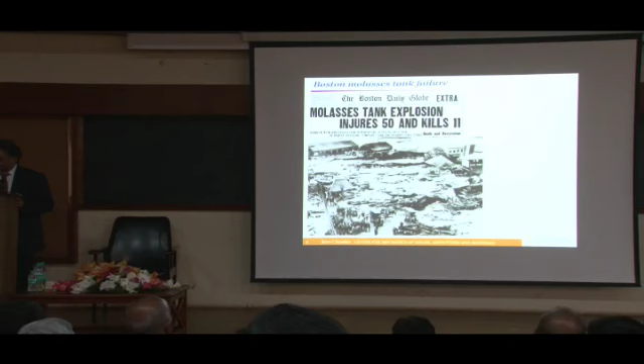Accidents like these happened periodically, and there was interest in being able to design against them, to learn about why these fractures occurred.

This is also a very famous example. This was a T2 tanker that was in a port, sitting still, early in the morning. It was very cold, and all of a sudden, the ship broke into two pieces.

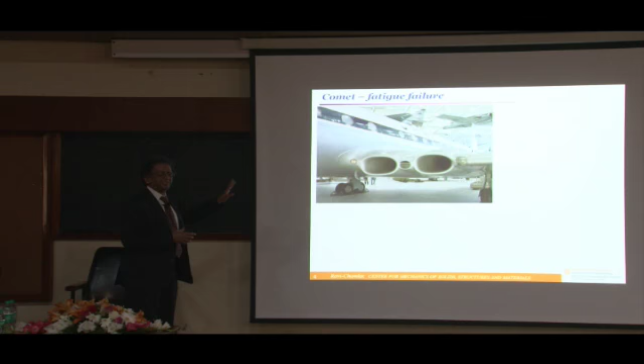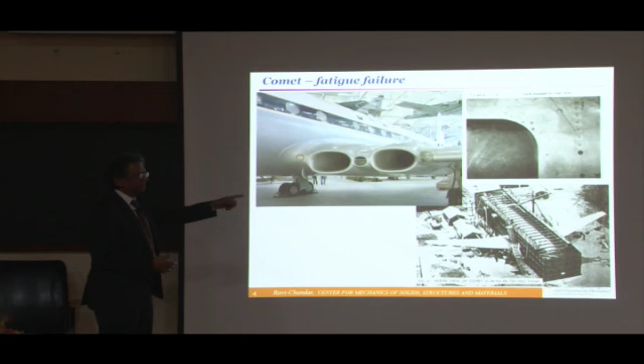What they did was build a huge tank, put the entire airplane in there in order to remove gravity loading, and then simulate the flight loads on that, to cycle it through to the same number of cycles that the airplanes in flight had gone through - the ones that crashed. And they found the idea of fatigue cracks in pressurized vessels.

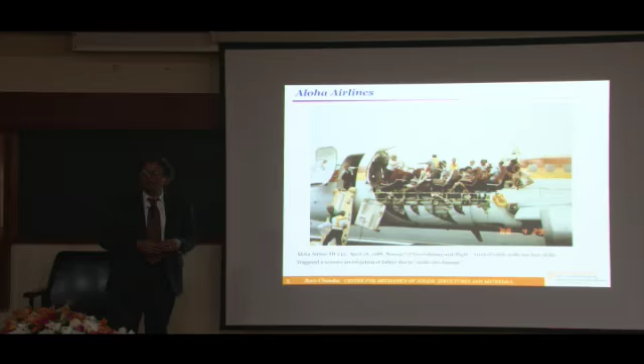Not a very large loss. There's been a theory that's been built on how things break in such structures. And it's not just engineering structures of the type that I have shown - I'll go through a few other examples.

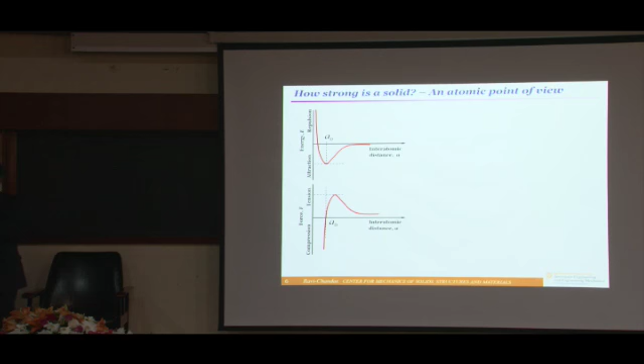You apply a tensile force, a pulling force, above a certain threshold, the solid will break. The atomistics will tell you that. I'm going to define what a crack is, not right now, but in a little bit.

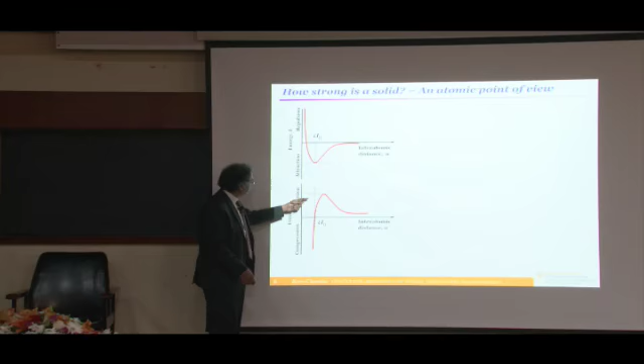Can I ask you to help me a little bit? I forgot to bring a piece of paper. I need a piece of... that would work. Yes, do you need it? Okay, not right now, but in a few minutes.

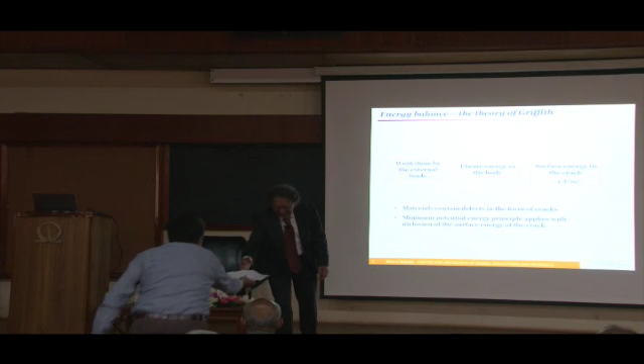So there are different buckets of energy: the energy that you supply, the energy that's stored in the bulk of the solid, and the energy that goes to the surface. That last term is a very tiny amount - for most materials, it's on the order of 1 joule per meter square. But if you ignore that, you ignore surface penalty altogether, so you have to keep that.

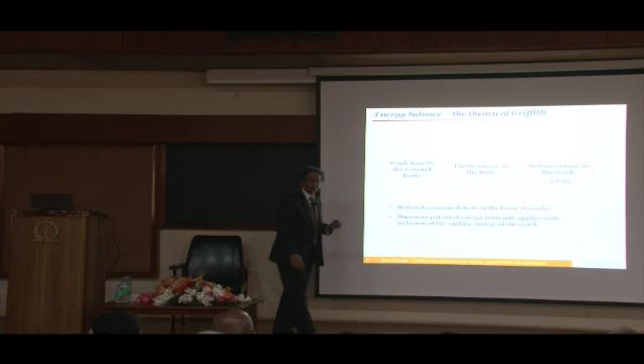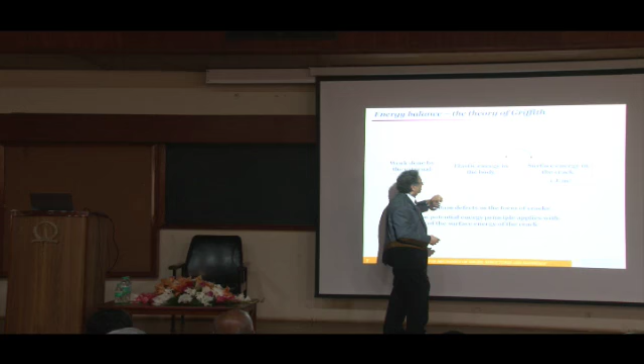So Griffith then suggested that you could have an exchange of energy between the elastic energy in the body, or more generally potential energy in the body, and the surface energy of the crack under suitable conditions. And then you give these names - you call the energy from the mechanical part of the system that gets released as the crack, the defect grows, to be the energy release rate, and label that G.

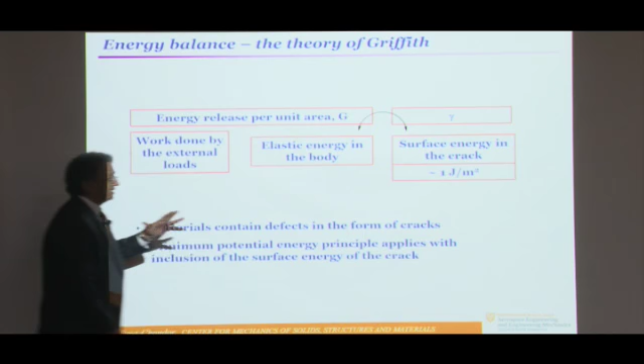The surface energy, let's label as gamma. So we have a condition for failure: if the elastic energy that is recoverable from the mechanical part of the system is used, in addition to creating a free surface, you're always adding the surface energy of the new surface you create.

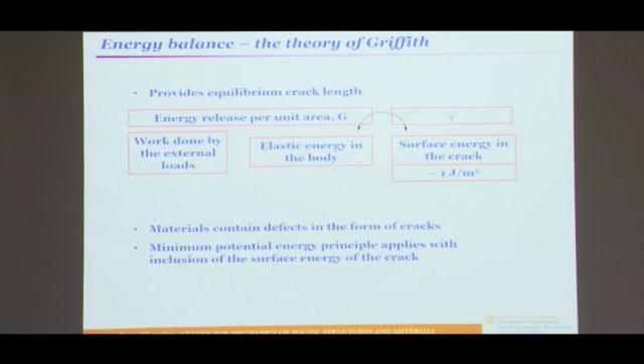It turns out that for most materials this penalty is anywhere from 1 joule per meter squared, but the energy release must be able to provide whatever is needed in this case. So I'm going to pull as I can, but it can't jump - it cannot go over that barrier.

I didn't apply a fraction of the load when I pulled on it. Now I have created this. So as I played around with it a little bit, I jumped over the barrier. There are many ways in which you can overcome this barrier.

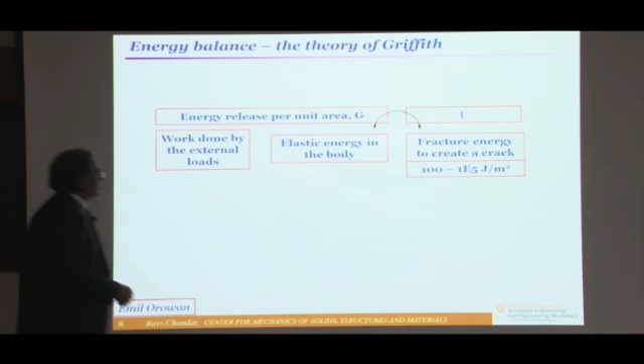The way I did this here was mechanical - I introduced a defect. I could do this chemically, through stress corrosion. What you do is bring water into the vicinity of the defect; it attacks the oxygen in the SiO2, pops off that bond, and the bonds are broken.

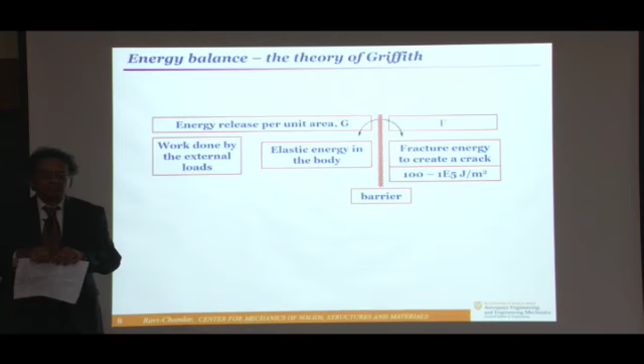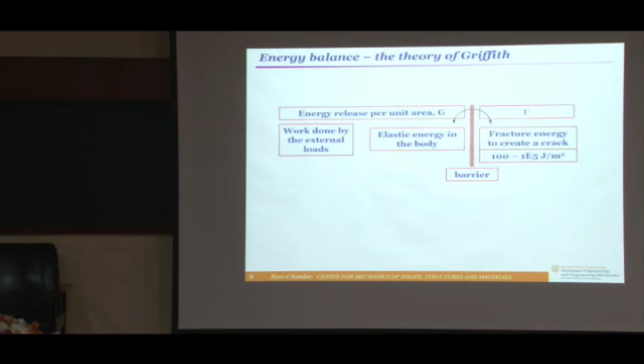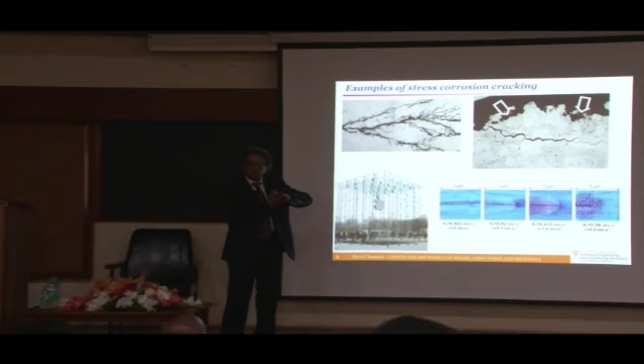But they're extremely slow - this glass will crack at about 10 to the minus 9 meters per second. What I've shown here is the Apple headquarters or Apple store in New York City, made of glass. If the crack only grows at 10 to the minus 9 meters per second, we're all safe - it's not going to break in the lifetime of most people in the universe.

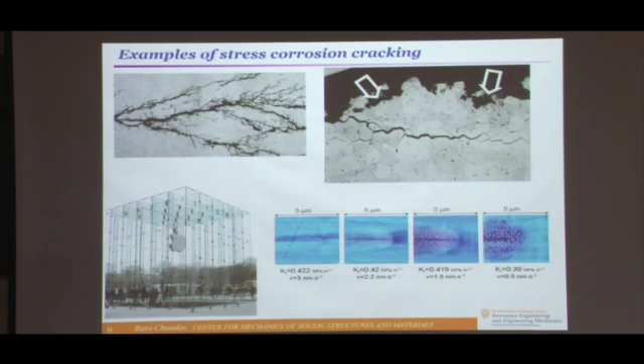Fatigue is another way you can overcome this barrier. You don't crack everything all at once by robbing the elastic energy from everywhere - you do it piecemeal, in a little place at one location, another place at another location. As you extract energy during cyclic loading, you generate fatigue.

I already showed you the comet. I'm now going to show another example. Cutting, machining, and other operations - chewing, biting into food, eating chocolate - all of those are fracture operations.

I'm going to show two interesting examples. This is cheese slicing - there are different types of cutters. This is very important in the food processing industry, to be able to cut things efficiently with low energy consumption. This is a wire cutter - the wire digs a trench and separates the two surfaces. There's a layer of damage left on the surfaces of what it's cut, but you can calculate how much work is needed to make this go.

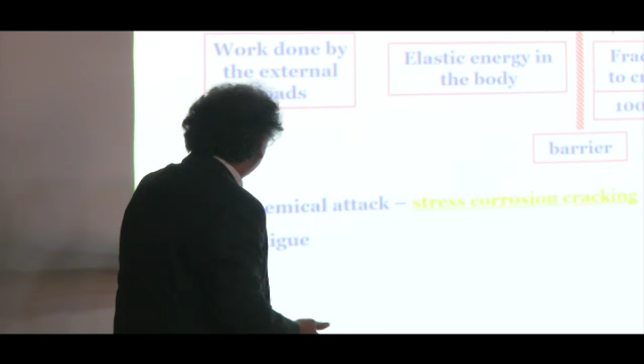Most of the body remains unstressed - it's only in the vicinity of where the wire punches in. Think about a cheese slicer, a knife blade of that kind - in addition to the work needed to separate the cheese, you have to pay for the friction on the two sides of the knife when it's touching. That has implications in earthquakes, and I'll talk about that a little bit later.

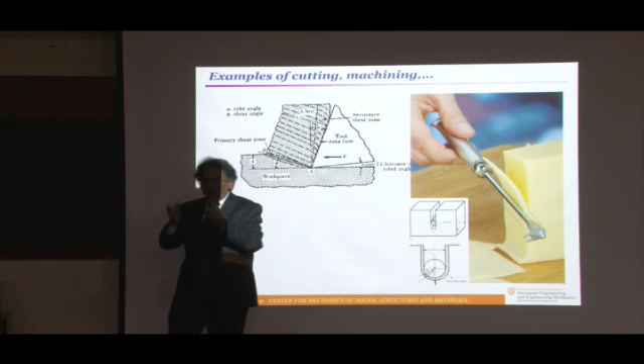The last example of cutting is one everybody is familiar with - this is a paper cut on a finger. Very little work has been done on the person's hand, but it's a deep cut that's very easy to make. If you try to tear the same skin by other means, by pulling on it, you're going to spend an enormous amount of work stretching everything outside. Very little work is really needed to make the cut. So in designing efficient cutting operations, you have to think about how you spend the energy that you have.

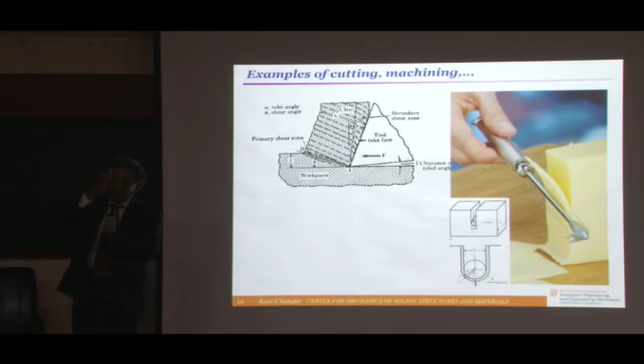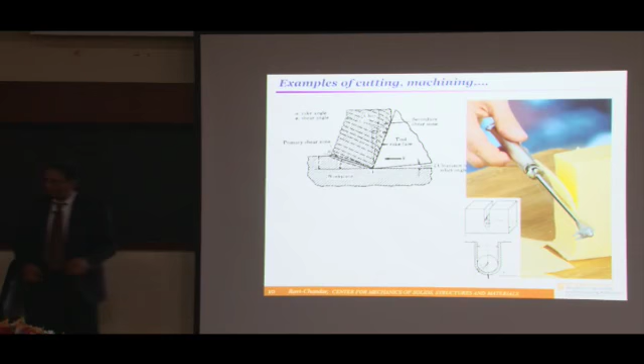There are applications of this also in anthropology, in archaeology. People go and look at fossils and teeth in particular, and look at the damage in the teeth, and based on that, going backward, try to find what kind of objects they would have been able to eat. So there's an application of fracture mechanics in those kinds of areas.

The last one is a large number of scientific and engineering applications, and I'm going to go through a few of these.

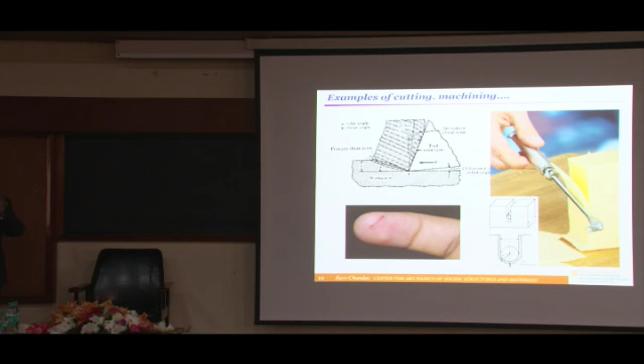Then there are a number of theories about how these things occur when an earthquake event occurs. This is a cracking event in that case.

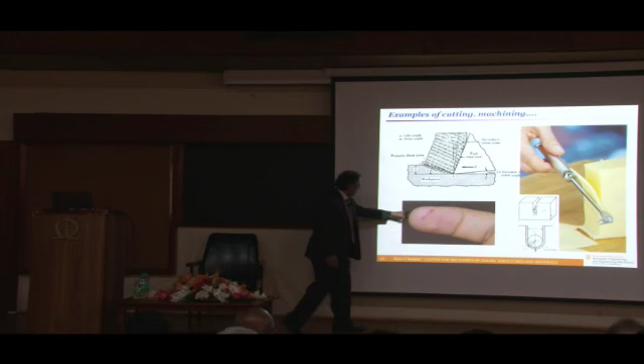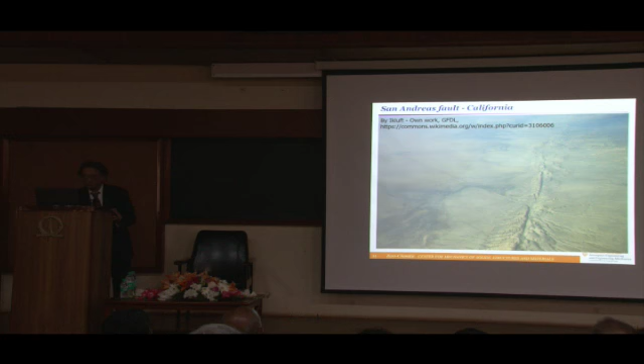There are rock formations and things like that you could see walking around various geological sites. This is one where a crack went straight down but created interesting patterns, and we'll see more examples of that kind. I'm going to skip through that.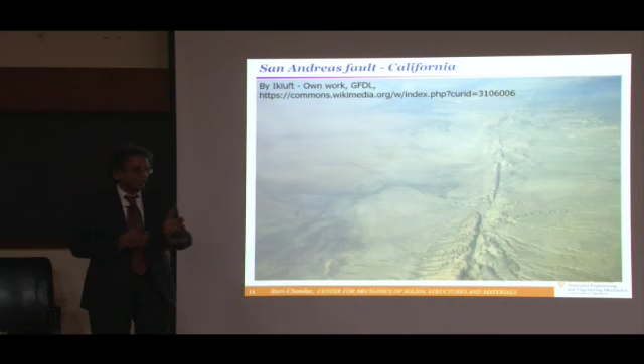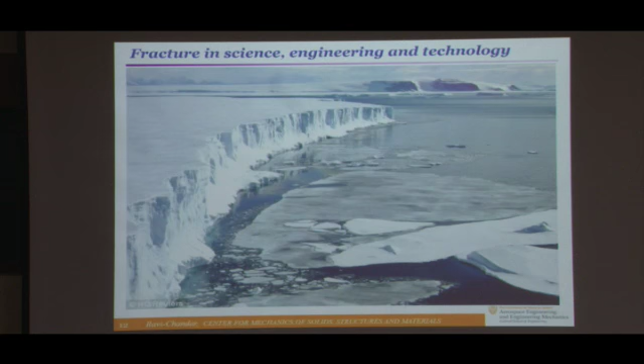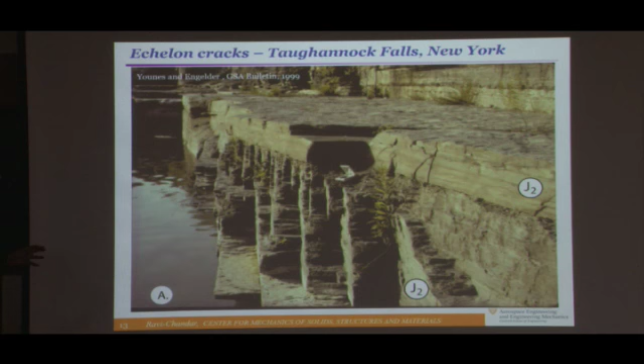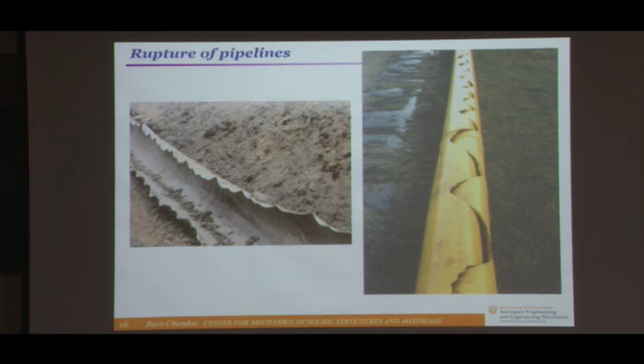All right, so that's a laundry list of problems that have fracture as an underlying theme, and they fall into one or more of these categories.

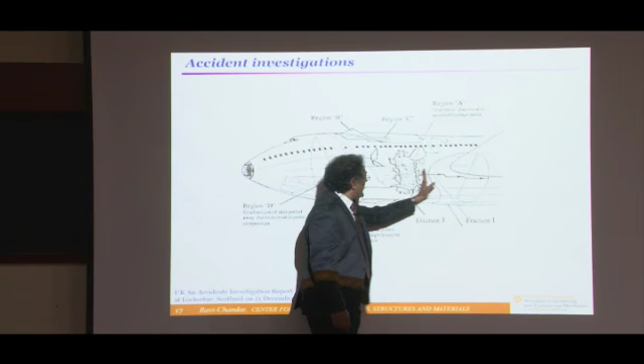In order to design against them, all you need to do is calculate the energy that can be released by the elastic system and whether that's sufficient to feed the fracture energy needed to create that new fracture surface. Much of this framework was developed by Griffith in about 1920 and then finished in about 1924, but it wasn't used because it was very difficult to implement in practice.

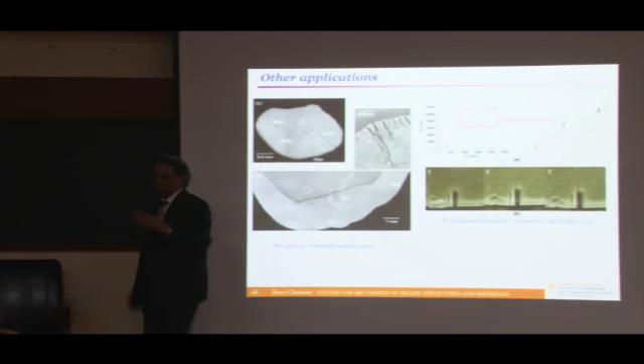In other words, it was difficult to calculate this for arbitrary crack geometries. So it took another 30 to 50 years to fully formalize this theory of fracture, and it took the role of two additional individuals, George Irwin and Max Williams, to bring about the right criteria for practical use.

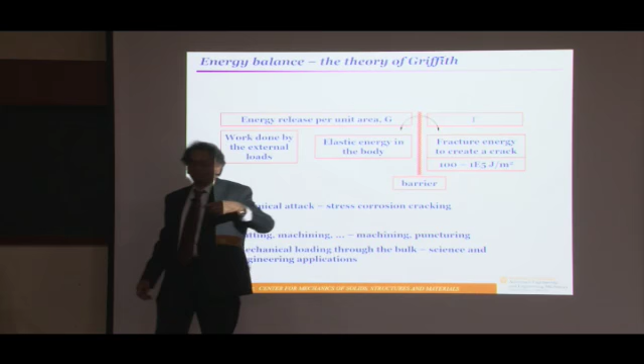So now I'm going to define a crack and a crack path. I was told by my hosts here that there was a lecture of this kind many years ago given by Professor Valluri, and in the audience was Sir C.V. Raman, and they had a discussion about the definition of a crack. Apparently in the end nobody agreed on what it was, or at least Sir C.V. Raman was not convinced of the definition of a crack. I'm going to define a crack, and we'll see if there's disagreement, and we'll engage in it.

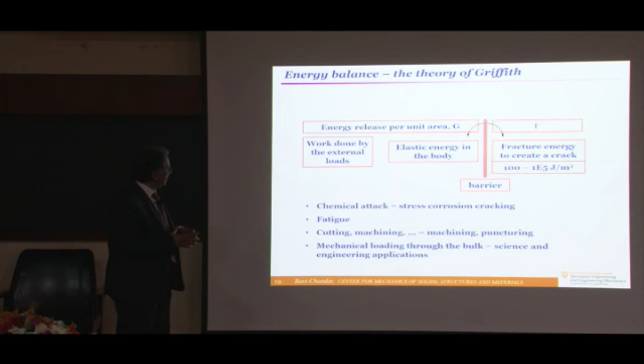The idea of a crack is that it is a surface, a special surface, across which there is a different set of material properties in comparison to what the properties are in the bulk. That's a starting point. That surface is terminated by a front, and we'll call this the crack front. This object is a crack.

This is embedded inside some other large object. This crack front may meet the boundaries of the object, or it may be completely embedded inside the object itself. Think of a very large sphere and a very small, flat, circular surface fully embedded in there, across which you're able to transmit forces in a different way than in the bulk of the solid. So that would be a crack.

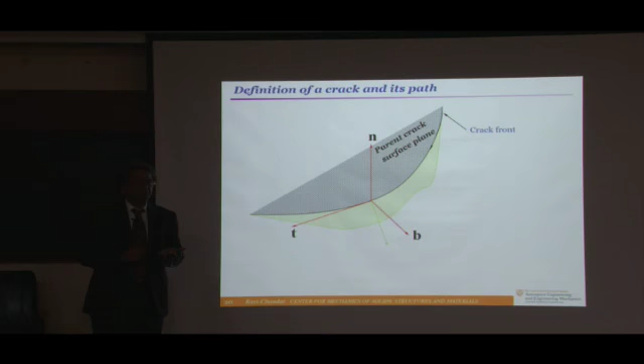The front, as you apply forces on the outside, may be able to move and evolve with loading. This green shaded plane is my imagined evolution of the crack as you apply the load. So the question is, what minimum things do you need to define how this surface is going to evolve? I've put in a triad of unit vectors: T indicating the tangent, N normal to the surface of the crack, and B the other normal.

It is not the Frenet triad. The N and B are switched. But I want the normal to be perpendicular to the surface of the crack at every point.

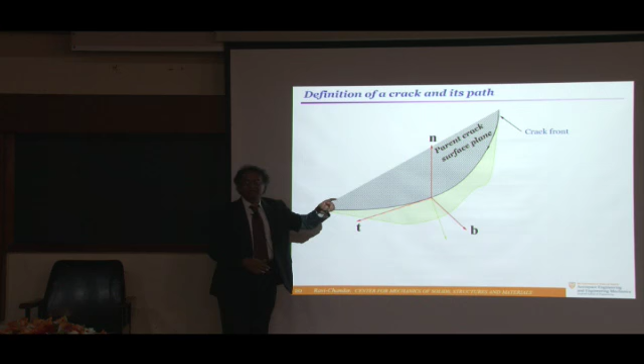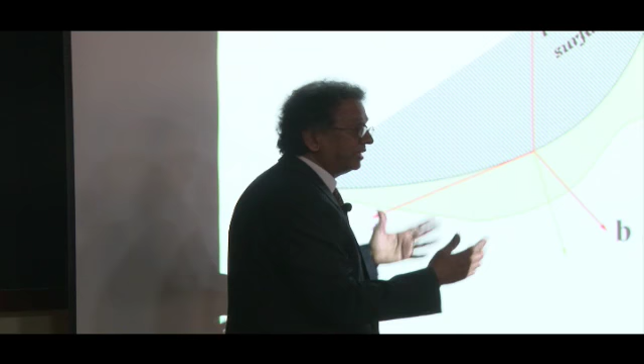If you now make a cut at some arbitrary location perpendicular to the T direction, you expose what happens in the NB plane, and we think the crack is going to extend, move, increase in length along the NB plane—so it goes from here to there. At every point along the crack front, if you prescribe what is the crack extension in the NB plane, you can recreate the crack front in the next step. It's an Eulerian description for a moving boundary.

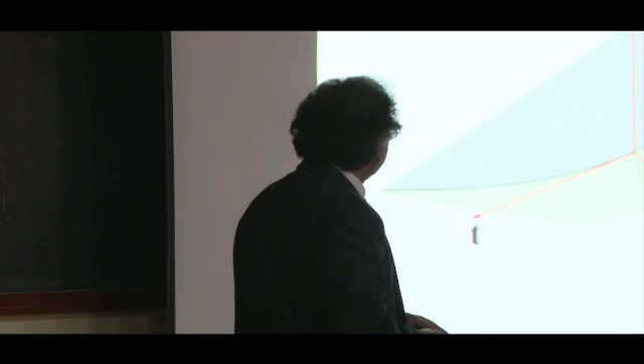Now you can think of three symmetries. This is the plane of the crack. If the loading is perpendicular to the plane of the crack in the N direction, this is called mode 1, or an opening mode. If the forces are in the B direction, this is a shearing mode, where the crack is being sheared parallel to itself, called in-plane shear. The last one is when the forces applied are in the T direction. This is called anti-plane shear, or mode 3.

In each one of these, the crack does something different. And if you now look at a local picture, instead of just the global energy balance I talked about, there's something that goes on in which the material goes from being intact to damaged material in this process.

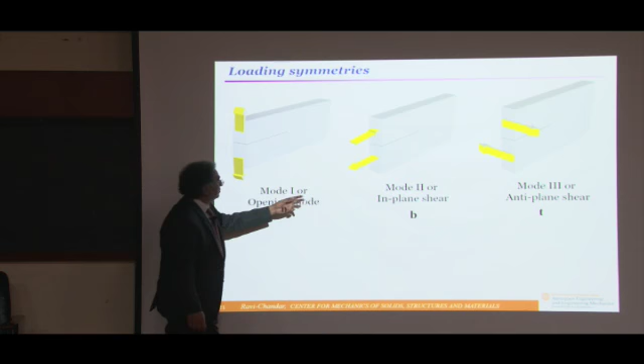Now we can read the elastic stress calculation done by two gentlemen, George Irwin and Max Williams. They calculated for an arbitrary crack state what would happen near the crack tip. The key result was that you can look at any crack and it will have the same character near the tip, and in particular, the stresses go as 1 divided by the square root of r, which means as r becomes smaller and smaller, the stress becomes larger and larger, with an amplitude factor we'll call k. This is called the stress intensity factor.

Irwin also made a connection between this object, the stress intensity factor, and the elastic energy. You get a very simple relation between these two that allows you to calculate the energy that can be extracted from the elastic system without doing a whole lot of calculations. Other people do a lot of calculations, but you use these to calculate what this energy release could be.

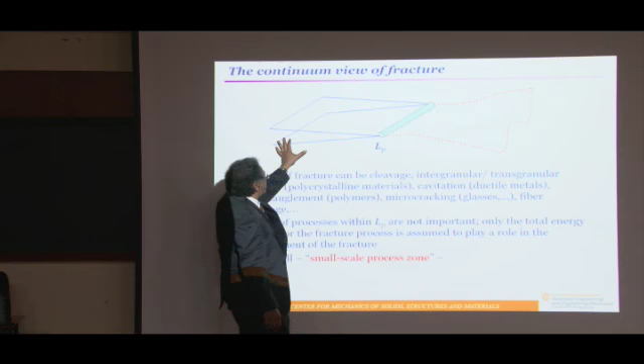That very simple idea allowed Griffith's fracture criterion to be implemented in practical circumstances, by the simple process of calculating what the stress intensity factor is. Because now you can postulate the failure criterion, the crack equilibrium criterion, by saying if the stress intensity factor meets this equation, the crack will fail.

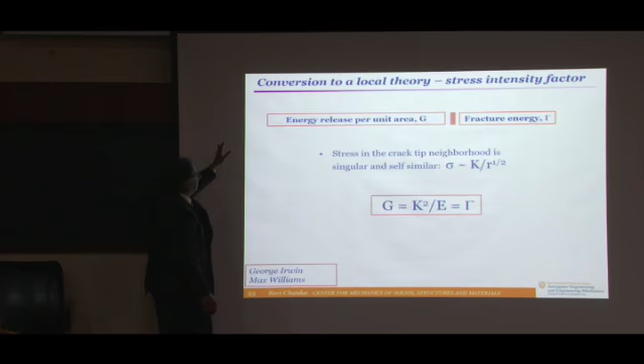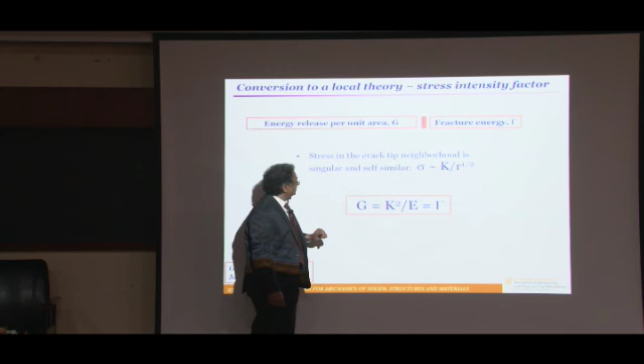This theory has been extremely successful in that we now have structures built to be fracture critical, that obey this criterion, where the stress intensity will never exceed this equality. This allows you to operate airplanes, bridges, automobiles, whatever, under fracture critical conditions, not strength critical conditions.

Let's move on a little bit.

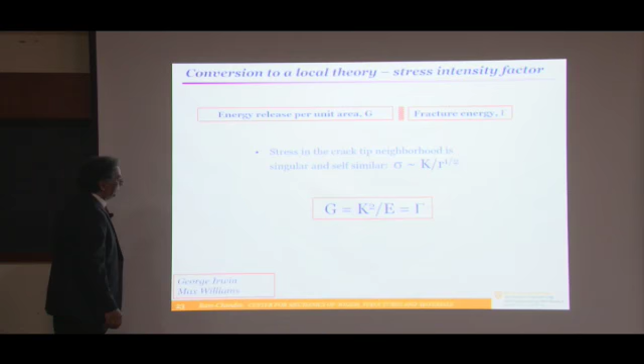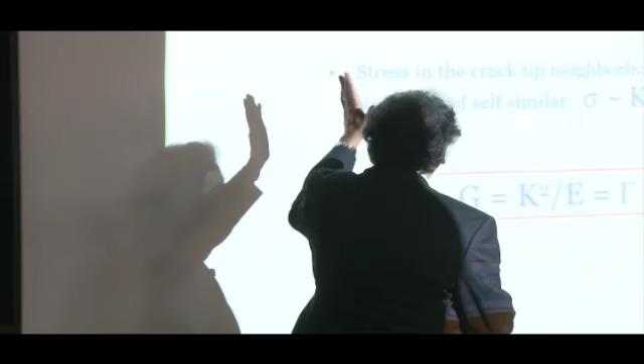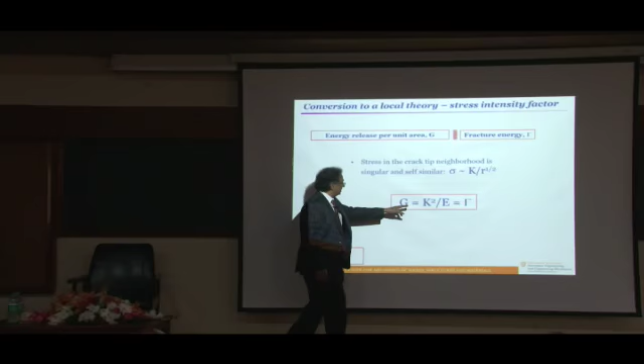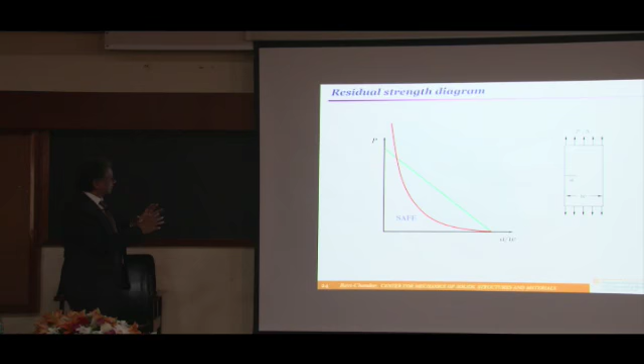So back to this criterion. This is adequate, and if you knew what the fracture energy requirements were, you could calculate when the crack would consume more energy by creating more structure to the fracture process itself.

The fracture process starts out somewhere at the sub-micron scale when it initiates, but by the time it's ready to branch, it's on the order of 100 microns in diameter. And that's what leads to it, when the fracture process becomes so large, instabilities set in that create these events of branching or fragmentation.

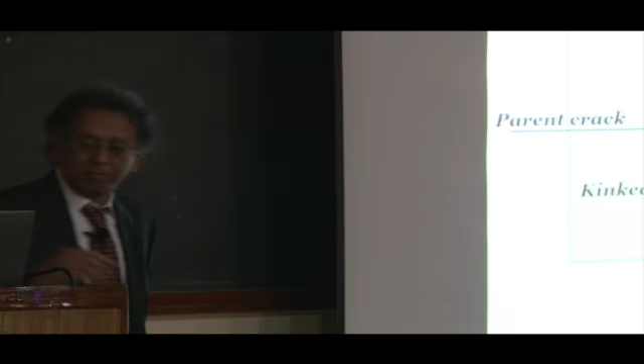The calculation of this branching is a little bit involved. The first person to attempt this was Elizabeth Yoffe in 1951, and the idea is very simple. The calculations have morphed in the years since, but the idea is still very simple.

Yes, one that I had many years ago, and another one Jay Fineberg did. I had lots of defects in front of the crack, of micro cracks, and they start deviating branches. Fineberg came up with something similar to this that will create branching—very qualitative in the way that we think about it to grow.

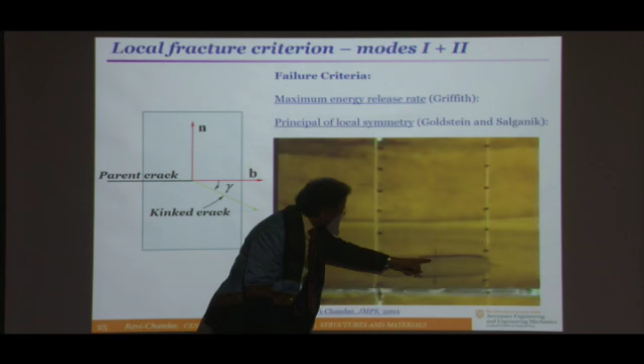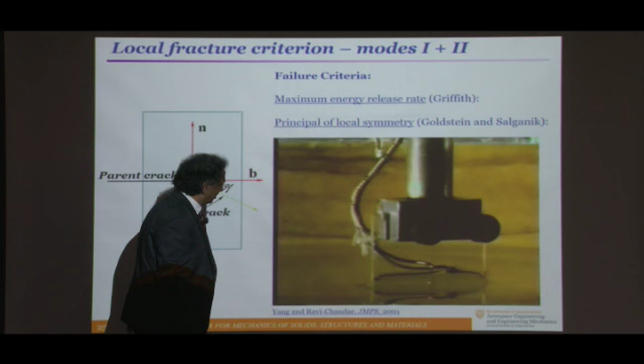A second simulation is for the pressurized semi-infinite crack. It grows initially straight and then bifurcates or branches into multiple branches. All of this is done without any intervention, remeshing, or anything of that kind—it's just one smooth implementation of the entire energy balance equation.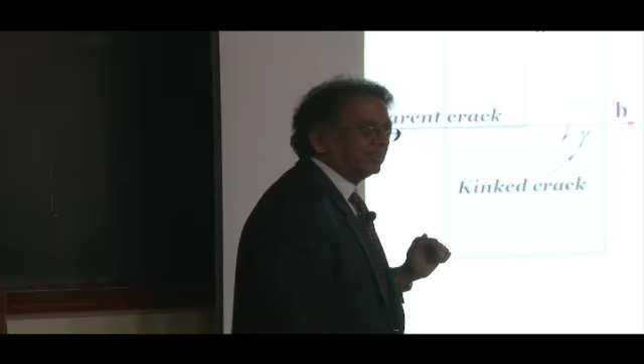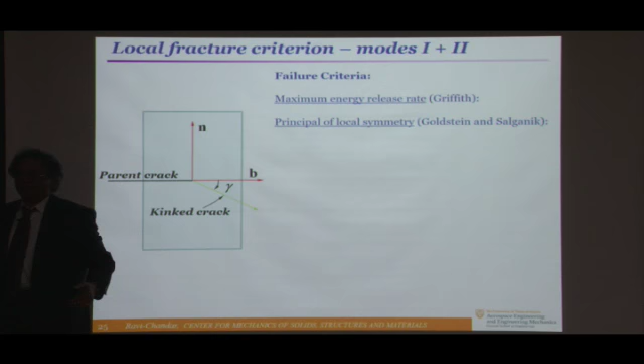I've tried to tell a story, maybe jumbled, maybe back and forth, but that's the story of fracture. This is how things fail, and this is what we need to model. So let me stop and see if you have any questions. Thank you.

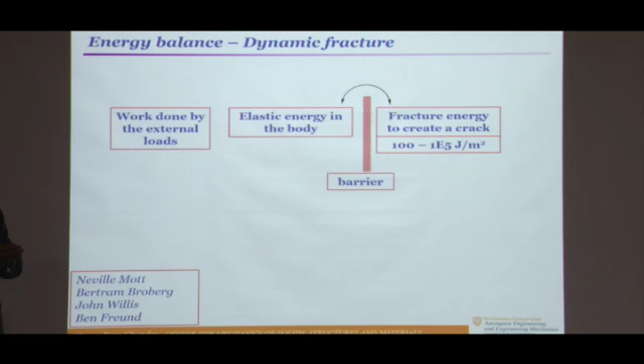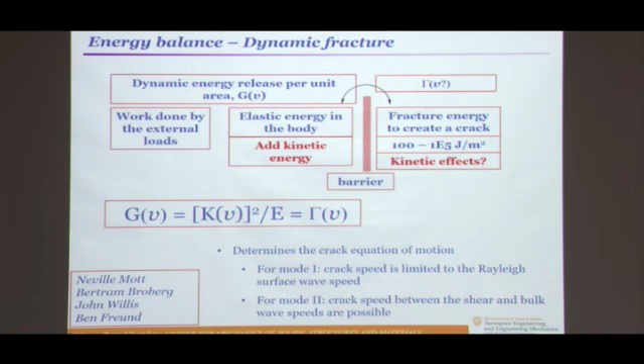It depends on a few things: the normal to the shear stress on the interface, and another thing I didn't mention—you need a model for how slip occurs as a function of rate at which slip occurs. So if you have the slip stress to slip rate dependence, one way or the other, weakening or strengthening, you would expect such transitions to occur.

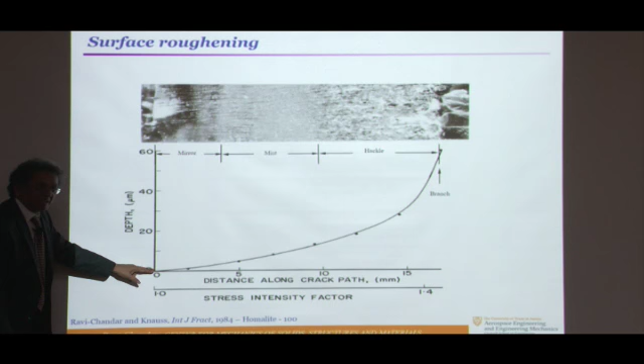What are the boundary conditions there? They're all traction free.

The other question is, since the phase field is emerging as really a powerful method, especially in this context of brittle fracture, what are your thoughts on the applicability of this to a ductile metal where you have dissipation and multiple scales? What would it take to make it happen? Like you mentioned, this parameter from 0 to 1, the order parameter, degrading the elastic, the stored energy—how would you do that in a ductile material?

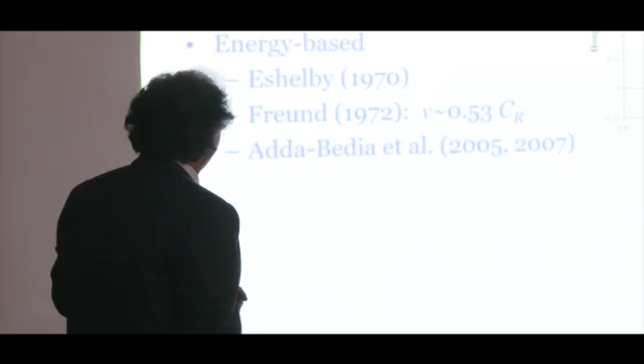So you can change how you degrade your material properties. In addition to, well, degrading elastic behavior is probably adequate—you will stop accumulating plastic strain if you start degrading elastic properties of the material, right? But you have to be very careful; this hasn't been done yet in a satisfactory way. But in principle there isn't any barrier to this. The phase field will just control what happens at the crack surface and a very small fracture process layer—it doesn't change what happens to bulk plasticity. So you do the bulk plasticity the way you normally would, but account for dissipation in addition to the elastic dissipation of the surface energy. You need additional order-parameter-type dissipation for plasticity.

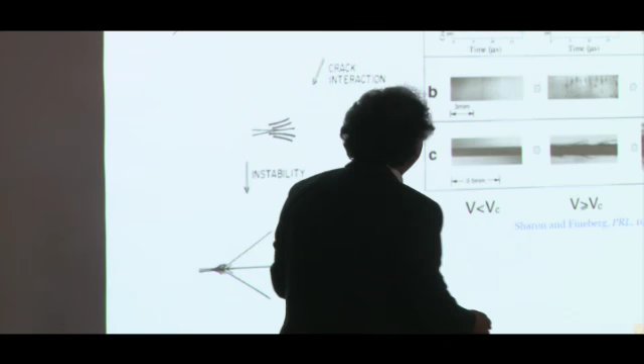So, excellent lecture, thanks a lot for the exciting explanations. I was in your talk some 20 years ago at Rice University when you gave the same talk, but since then the simulations and the advances that were made now...

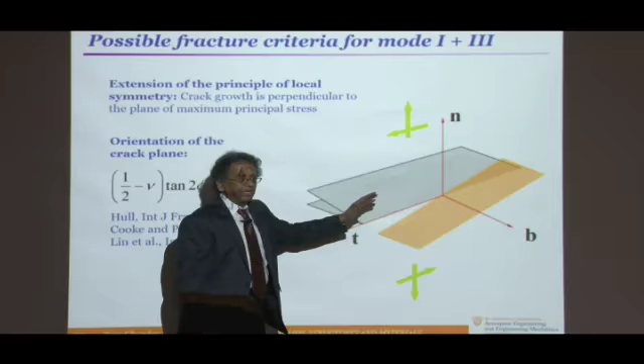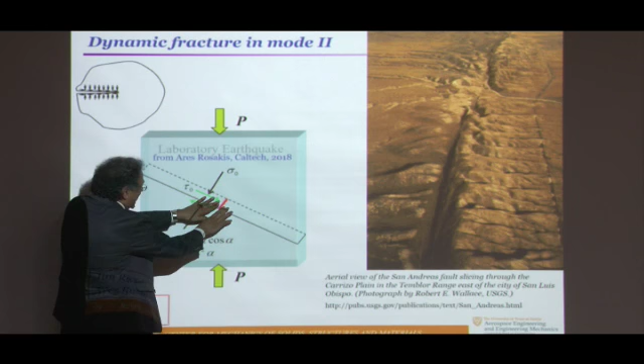Because there's no other symmetries, when you try to minimize energy, it's not going to do that correctly.